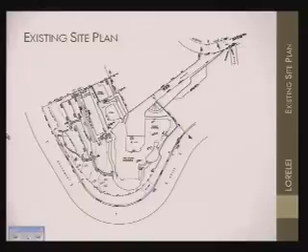It's a U-shaped entry court that brings you down. When you arrive at the bottom right, you'll see the motor court. And there's still a few steps down before you get actually into the entry court of the house.

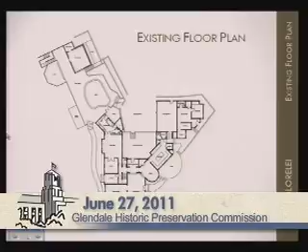This shows the original layout prior to any modifications that were done. You see on the upper left side, that's where the original pool cabana was, as well as the pool. There was a series of retaining walls there, as well as some planter walls. When the owner purchased the property, this area and the areas below were intensely over-vegetated, so he's slowly and methodically cleaned that up and has restored it back to very manicured lawns.

On the upper left side, you'll also see there's a staircase that brings you down into the site, as well as a bay patio. That bay patio is what was used as our definition for how far the extension of the addition went when they proceeded to build without permits. So they tried to stay within what they considered a buildable area from what was perceived from before.

Just on the lower part of that angle is a rectangular space, which was a shed that contained all the mechanical equipment for the house. In the upper right drawing behind you, you can see an elevation of that area that shows that shed and also that bay that came out. Underneath that extension and underneath the shed area is a crawl space that has been used as a maintenance yard, a landscape boneyard, as well as an equipment room for all of the equipment for the main house.

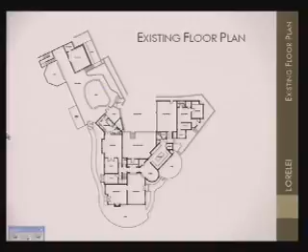Seth, if you want to address the drawings directly, you can go back there too. Okay. So, I have most of them actually in the presentation, I believe.

Just to give you familiarity with the property itself, once you drop down, the upper left is a very quaint landscape trellis entry gateway. The wrought iron details, the arched windows, the stained glass, all of these elements are original to the house, and if anything have been cleaned up since the current owner has taken possession. Truly sets a tone once you step down into that courtyard.

These are just additional images around the house, just showing the architecture, the feel, the forms. It's a very organic structure set up around that courtyard on the promontory, trying to take advantage of all the views, 270-degree views from east all the way to the west.

This is the pool area. These photos were taken recently, but not recently considering the construction that's gone on there. The pool house itself, portions of it still remain, but portions of it were failing at the time of possession of the property. There was consideration early on of adding on to this structure, and code and other elements stopped that plan.

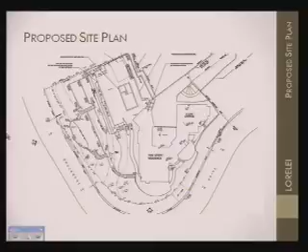Coming to the pool area, the exterior bottom limit of that deck was set by the existing patio that was there before, and just extended out and orthogonally closed off about where the mechanical room was, but it does increase the deck space that they had previously. We're showing a freestanding arched structure to delineate areas on this patio. It will set up for some level of shade or respite from the rest of the area.

And then we have the open trellis bar area for entertainment, for historic events, for general leisure on the patio. We are showing, and it is identified in the program, a fire pit, but it looks like that is just going to be a temporary, freestanding, self-contained element as opposed to a hard-lined and piped fire pit. So more of a decorative landscape element than anything permanent, as are all the other elements, with the exception of the relocated pool in this area.

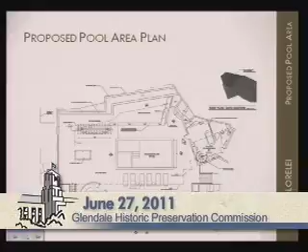I do show on this plan the reconstructed master bathroom area, right there. That area is currently set up as a shower and an outdoor courtyard. The idea will be to roof that whole area in and close it by stepping back the wall that faces the pool. We have no set dimension on which to set that wall back.

It's somewhat arbitrary, but respectfully, 2 to 3 inches isn't enough. It should be at least the width of a tile or a CMU block or some member, to bring it back about 6, 8, 9 inches or so, so we can tie the roof in a little better as well. So we have no problems addressing that concern for the commission.

And then inside that bathroom, we show the extension and the spiral staircase that will bring you down into the addition. Originally, we looked at perhaps adding an appendage to the corner of the structure. Per recommendations from the commission, it's best that we take that inside the corner of that part and leave the house intact as it is.

And in fact, as the commissioners were able to see, there's a doorway at that lower level that was always part of the main house. There was a stairwell or a pathway or a chase that came down at that lower level. So in terms of constructability, there's less work to be done because it's already excavated, but it certainly needs to be reinforced up to modern code. But we feel relatively happy that we maintain the corner of that house, and it really appears almost like a secret entrance into this lower area.

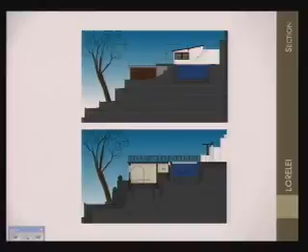This drawing shows the elevation of the proposed area. The archways were more or less dictated by the structure that I found when I came there. There's a rhythm that was set up by the structural steel, so I tried to work backwards into the sizes of those elements.

As I mentioned during the walkthrough, there's consideration to widen a little bit the pilasters in between the columns, which would reduce the squatness, perhaps, that you're seeing in this. And it'll provide us a little bit more bearing to grow some vines and bougainvillea and things like that.

The reason for the windows appearing somewhat squat at this point is as we were going through our building height and FAR review, we identified through survey, we had it surveyed at both points, the tip of the turret and the tip of the roof, as well as the bottom of the new structure, that we were 17 inches exceeding the building height limit.

So as a response in discussions with the planning department, we're going to raise the elevation around the structure up 21 inches to satisfy the building height limit, which will mean that you will step into the new addition and then step down 3 risers into the space. And that inadvertently forced the windows that were larger to become squat at the lower level. So we can look at addressing the rhythm of those windows.

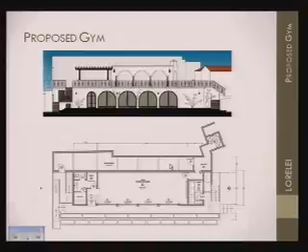Touching on your point about the view shed from Columbus and Cumberland, it was something that I had not identified until you had mentioned it, and certainly when you go through that area walking, you can identify it. It's as if you're looking up an Italian hill town. You kind of see Spanish tile roofs, a couple asphalt roofs and whatnot, but you kind of get the stepping feeling of going up a hill.

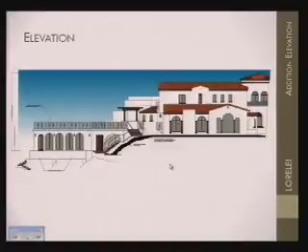We don't perceive this structure being out of line with that. In other words, we see it being more or less in the massing of the other structures that are on the hill. With perhaps some vegetation, certainly with a bougainvillea, we'll take down the whiteness of the massing right now. But perhaps with some more infill between Cumberland and the actual property, we think over time we'll probably fill in some space so that view shed may not always be there.

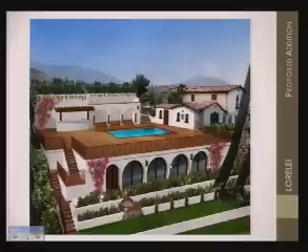And this is a rendering. This more or less shows the idea and intent of the final product. It doesn't show any of the furniture necessarily on there, but it does show the permanent structures that we intend on building. The archway, the freestanding structure is more or less in the same scale as the adjacent building. The wood trellis doesn't necessarily fall in period, but with some carvings and some detailing, we think we can get it a little bit closer and certainly antiquing it a little bit. But we don't think it's too large of a structure against the historic look that we would ask for it to not be part of this project.

This rendering also shows a cleaned up version of the master bathroom addition, and also picks up more of the vegetation that we held from the other drawings just to show the massing and what we're doing. And this is just a detail of the actual freestanding structure that we intend on building. It shows the columns that we're going to pick up from the rest of the main residence.

We're indicating on the back side an outdoor fireplace, which would be a formed plaster. We were really just going to keep it into that rough, not smooth trowel, but it's a trowel stucco that leaves somewhat of an undulation and an imperfection to it, which is found all over the house and most houses that were built in this time. And the contractor and the owner are adamant about recreating that imperfection throughout the additions.

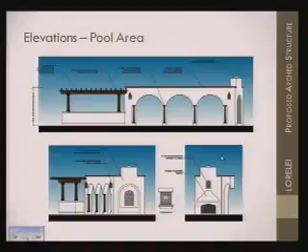We will try to utilize tile that was taken off of the existing pool house that was removed, and we will supplement the addition on the upper right to the master bathroom with that tile, as well as a tile band on top of this freestanding structure that you can see right there. The Spanish tile, the decorative tile, will either be elements that we've picked up before or will be elements that will match to some of the existing tile that we've found on the property.

Are there any other speakers? Or any first questions for the architect? Would you like a question? I have no questions at this time. I just have one question. The one that I'm interested in. When Milo was talking about increasing the recess of the master bathroom addition by 3 or 4, how will it affect your design? On the inside? Yeah. If I can...

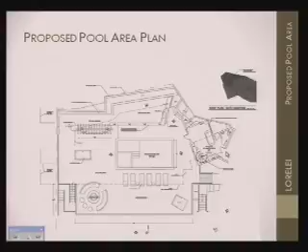I have a question as well. You mentioned that the clay tile on the roof was an original 1929 roof tile. And the one on the pool house would have been at a later date. Do they match, or is there going to be a differentiation? I'll verify. They relatively appear to be in the same flavor and same wearing and value of color. If not, I guess our recourse is to introduce new clay tiles, but try to weather them or try to age them, antique them. I know this contractor is very, very good at fauxing things to try to restore them into that vein. But that's something that we'd have to address when we get to it.

Is that something that we would bring back to the board as a... If the commission asks you to, they might allow that to be reviewed at staff level. The other thing to consider is salvage tile. Sure. Okay. Thank you.

Any other questions? Then we're good. We'd like to bring up the other request to speak. That's the owner of the house, Mario Lopez. If he'd come up. I'll put your name in if you wanted to speak. I don't know if you wanted to, if you wanted to supplement anything.